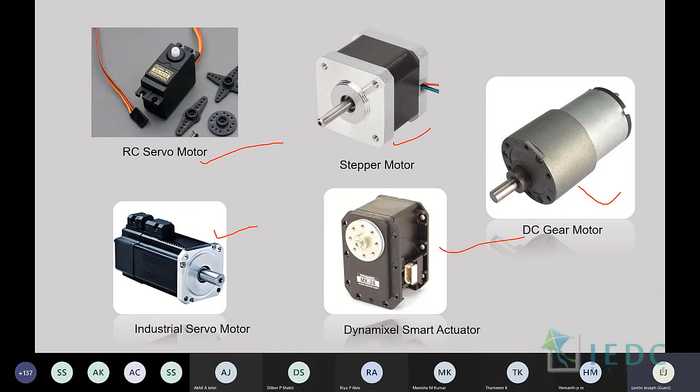We have the industrial servo motor, which is used for industrial robots. You may have heard about robots used for manufacturing cars and similar applications. These are the actuators we use for that. We also have smart actuators available, which are modules having the actuators and some control units, making them intelligent actuators.

These are some of the sensors, the basic sensors. This is the IR distance sensor, and this is the ultrasonic distance sensor.

And these are some of the advanced sensors. If you've heard about self-driving cars, you may have seen a sensor on top that is actually rotating - this is the Velodyne LiDAR. It can give you a 360-degree 3D view of the surrounding. From this 3D, 360-degree view of the environment, the car is able to detect obstacles, map the surrounding, and do a lot of things.

We have laser scanners, which give 2D points of the surrounding, but it may be only in a plane. There are some rotating laser scanners as well.

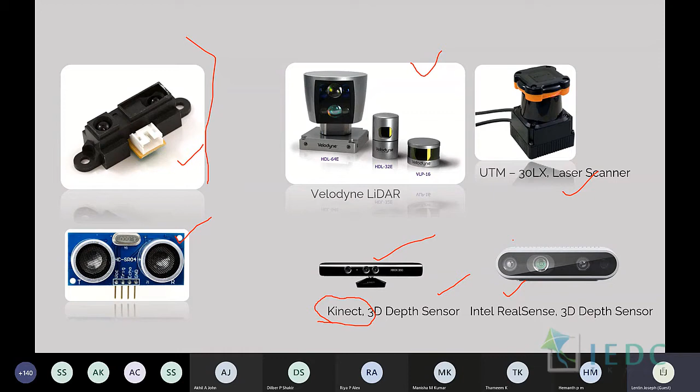We have depth cameras, which are very common in robots. You may have heard of a sensor called Kinect from Xbox - it's an old sensor, but there are many new ones available. Depth cameras have an RGB, normal RGB camera, and along with that, a depth sensor so it can give you 3D points, like XYZ points, of the environment. This is very useful while working with robots.

The new Raspberry Pi is very powerful, and you can just buy this board. I think the cost is around 2,000 to 3,000 rupees, and you can just connect this board to a display and use it as a computer.

If we want to work with computationally intensive programs, we have boards from NVIDIA like Jetson Nano, TX2, and Odroid. These are all mini PCs, single board computers. We also have industrial PCs for industrial applications. I just want to show you some examples of computing units that we can use in robots.

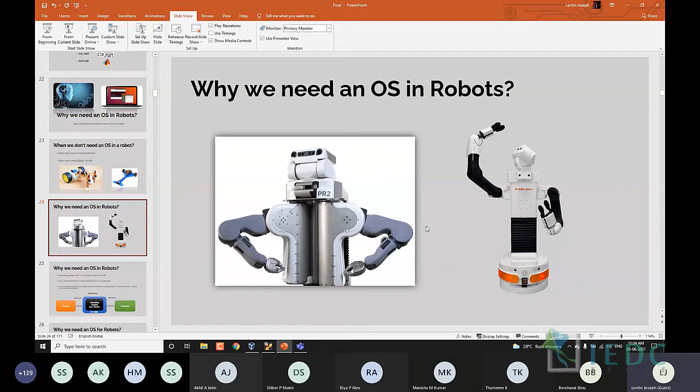If you want to work with this kind of robots, you may have to use a full-fledged computer. In case of a line follower, we can use a microcontroller, but in case of a complex robot like this, we may need a full-fledged computer.

So if there is a computer, we may need an operating system. What are the operating systems we are using? Windows is there, Ubuntu is there. In case of complex robots, we may have to use an operating system, and we have to use a full-fledged computer as well.

But in case of small robots like this, we may not need that. So that's what it is saying.

The most popular operating systems we use in robots are Ubuntu or Linux variants, and we are also using Windows. If you want to work with some real-time operating system, real-time tasks, then QNX and VxWorks are there.

You may have some confusion about whether the robot operating system, ROS, is a fully-fledged operating system or not. I will answer that question. It's not a fully-fledged operating system like Ubuntu or Windows. It's actually called a meta operating system. I will come back to that.

Just understand that we may need a full-fledged computer to process the sensor data from the complex robot, but in a small robot we don't need that. That's the differentiation. So in a complex robot like this, we may need to install some frameworks like ROS.

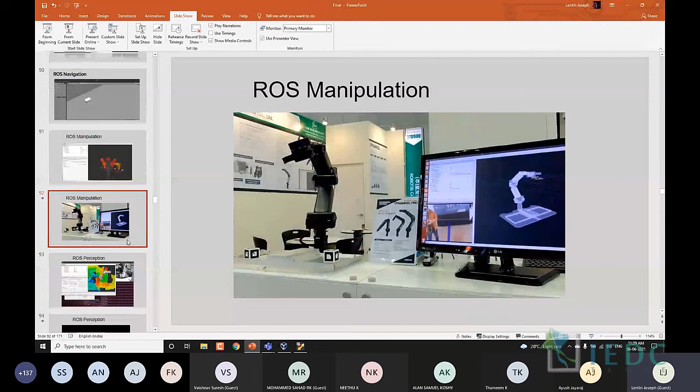You can build your own autonomous mobile robot, or pick and place robotic arm, or some perception like map building - anything is possible. That is the important thing. This may be useful to you, because if you are planning to prototype any project as a main project or mini project, you can think about using ROS. But you have to learn more, then only we can do the customization.

Yes, and finally, ecosystem. Ecosystem simply means if you have any doubts related to programming or anything, you might search the internet, right? You may get some Stack Overflow link or something - that is actually called ecosystem. If you have any issues, there is a community to support you. Similarly in ROS, if you have any confusion, there is a big community around it, a great community, a lot of developers. The ecosystem is very strong. If you have any confusion, I'm sure you will get the solution, mostly from the web.

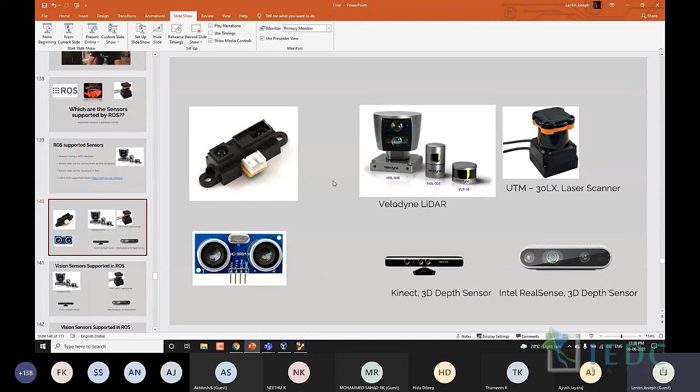Then there are many robots like this - service robots, robotic arms, mobile robots. Also there are many sensors supported by ROS, meaning you can simply interface these sensors into a computer and run some ROS program, so that ROS program will read these sensors and publish to some topics. So these are some sensors.

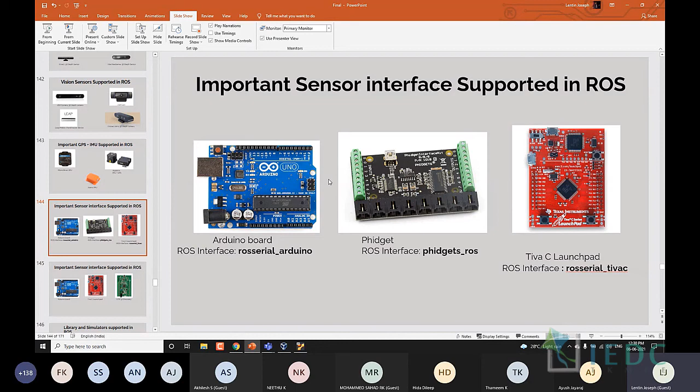USB cam, obviously, then some depth cam - this list is very short; there are many robots and sensors supported in ROS. These are some IMUs supported, and also you can interface some IO boards, input output boards, like Arduino, Tiva board, and each board can act as a ROS node. You can search for ROS Arduino and you will find some references.

Now the important one for you - who all are using ROS. The list here is not complete, but in my opinion many companies are working on ROS, mainly the vendors. For example, a company like Intel manufactures different cameras like depth cameras and normal RGB cameras - they are providing sensors, and they are also providing the ROS driver. So these companies are working with ROS as well, with different branches and different teams working on ROS.

And you know, companies like BMW - the list is not complete - I mean Bosch, then even in TCS, Infosys, there are robotics teams. I think for TCS there is a team in Bangalore - one of my friends is working there. So they are also working in ROS, ROS 1 and ROS 2. Many companies are working in ROS.

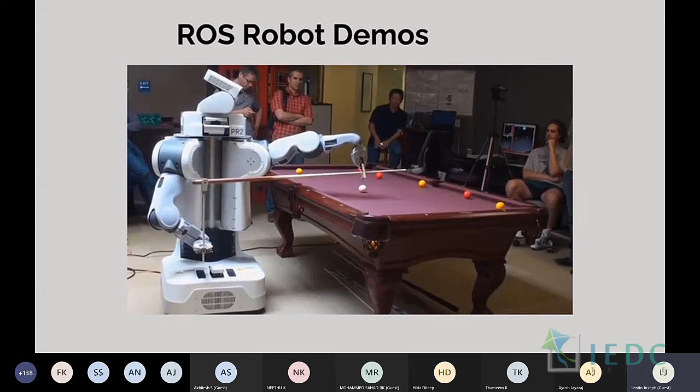It's not simply hitting the ball. There is a camera on top of the pool table that detects the balls, and there's a planner algorithm running. After planning, it feeds into the robot, so the robot will hit the ball at a particular angle. This is the planner algorithm you can see.

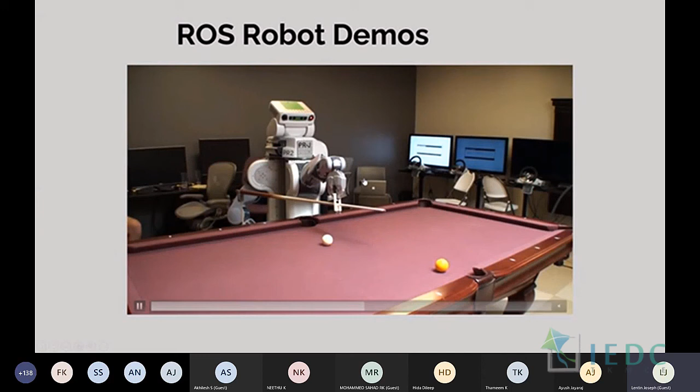There are many ROS-based demos available on YouTube. Just search for Willow Garage demos and you will get them.

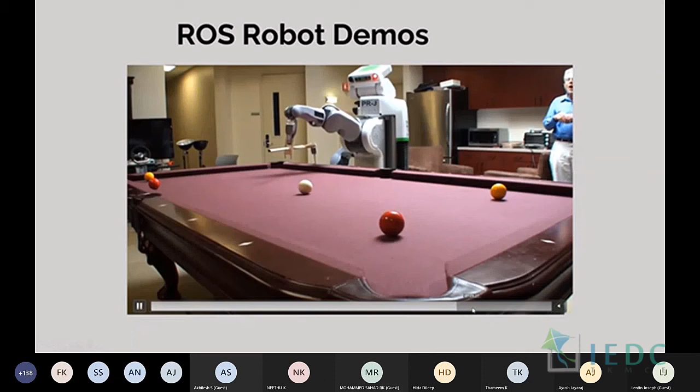This demo is called Pool Shark, and there are many video demos, I'm not playing everything. This one is called the Turtlebot 2, running an application called People Following.

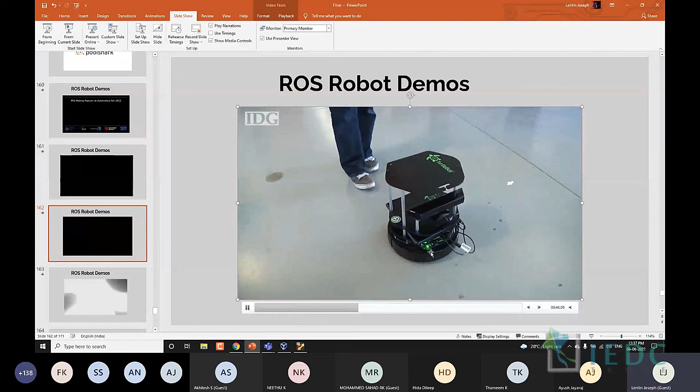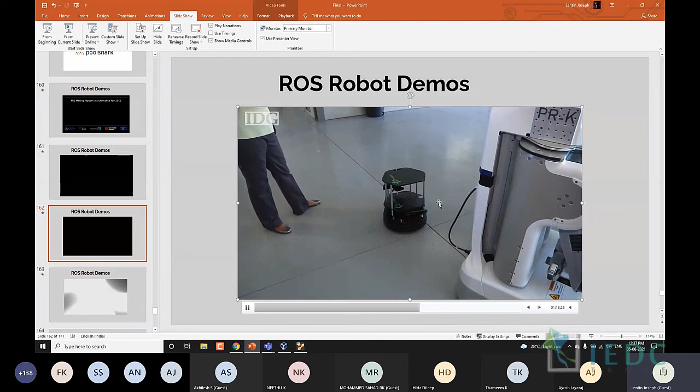There is a computer inside the Turtlebot 2, a netbook placed inside, and a depth camera called Kinect. It is mainly used for education and research. Here, the Turtlebot 2 is following the PR2.

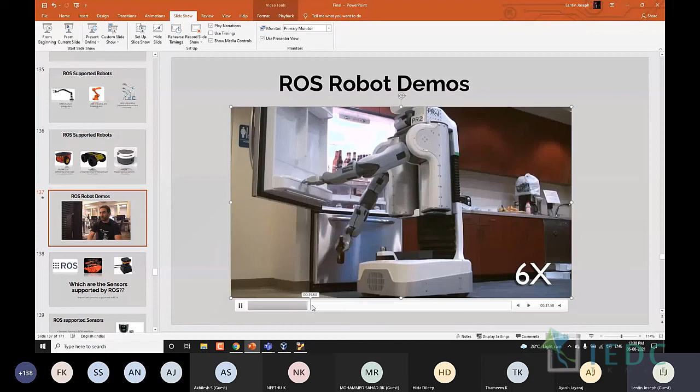And one more demo, fetching the beer. This is an interesting demo as well. The researchers in Willow Garage are trying to procure beer from the fridge. They created code so that the robot will go to the fridge, pick up the beer bottle, and bring the beer to the table.

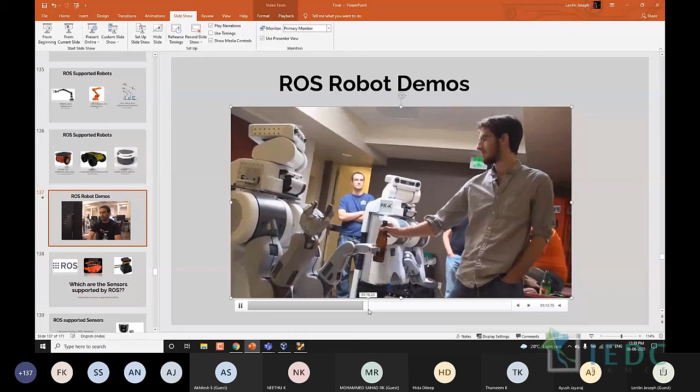As you can see, these are all interesting applications, but none of them are very easy, it's very difficult to implement. You can see it's playing at 5x speed, so it is actually super slow, very difficult to open a fridge and take a bottle from it.

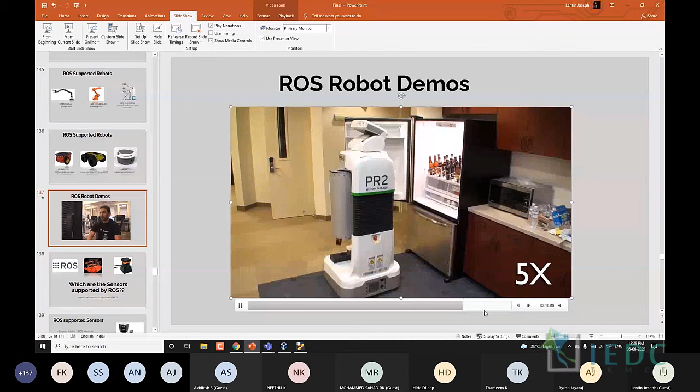Now I can show you some real world simulations. I'm just executing some simulation, so in the meantime you can ask doubts if you have any.

After that, I think we can conclude. After showing these demos using navigation and manipulation, I think we can conclude the session. So in the meantime, let me know if you have any doubts, guys.

So now what you are going to see is a simulator called Gazebo. Inside the simulation we have a robot called MIR, which is used in warehouses. This is the simulation environment.

What I'm trying to show you is navigation, basically going from point A to point B. I think I have already shown you the video of that. So I'm just starting some commands using the command line tools, you can see the importance of command line tools now.

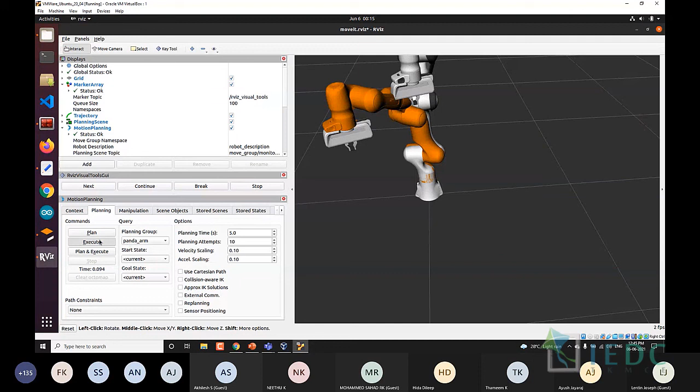Just a second. So there is some issue with the simulation, but I think it will be working in the visualization. Let me check. Basically, what is happening is that we can move the end effector. Let me just close this and start it again.

So, Panda moveit config, demo.launch. Okay, I think this will be better. So I'm just showing the motion planning.

I'm just moving the robot to here, then planning it. So you can see the robot is going from that position, the initial position, to the goal position. This is the robot motion planning.

And there is a framework called MoveIt. This is actually helping us to do the motion planning in robotic arms.

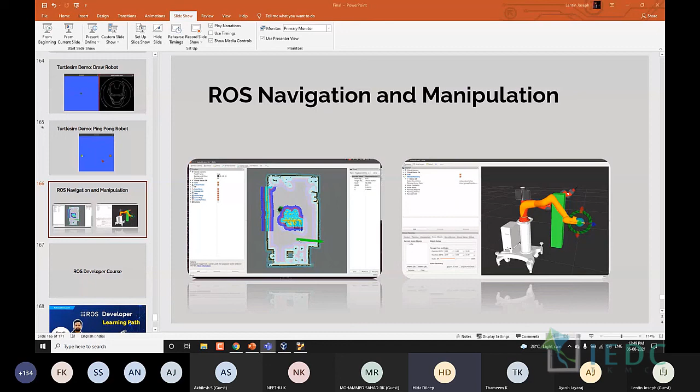Thanks everyone, bye. So if you have any question, you can ping me or connect with me on LinkedIn as well. Okay then, bye everyone. Thanks for attending. Bye. Thank you sir. Yeah, thanks sir. Thank you sir, thank you sir.